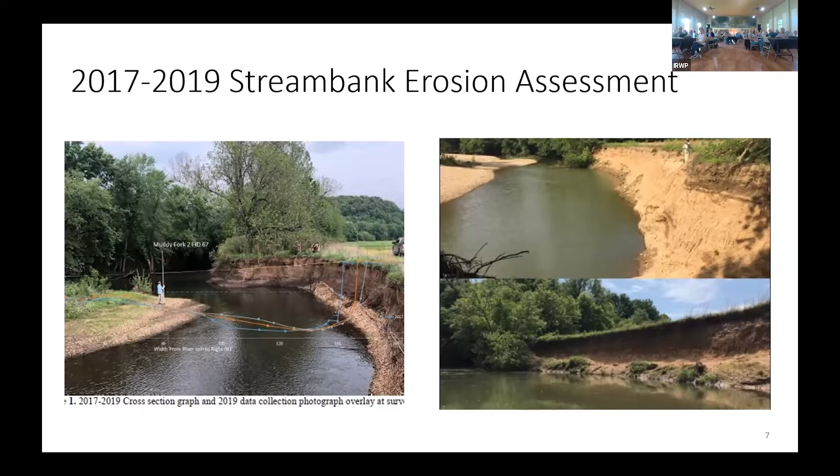So these are just some of the results. 2% of the stream banks rated as extreme, losing at least 3 feet a year. The takeaway here is that 38% of the stream banks were losing at least 1 foot per year, and this is across the entire watershed.

What this indicates to us is system-wide change. Something is happening to this watershed to facilitate, to cause this extreme erosion that we're seeing.

We had an average erosion rate of 5.2 feet per year. We had one landowner that was losing an average of 42 feet per year.

Sediment loading of the study — this is just the study area, which was about 5% of the stream banks in the watershed. Just that study area was loading 37,000 tons of sediment per year. Phosphorus loading was 56,000 pounds per year.

We worked with our 5 largest wastewater treatment facilities to put that number in perspective, to have a number to compare to. They are putting in 24,000 pounds per year. So stream bank erosion alone is loading over twice the amount of our wastewater treatment facilities.

The takeaway for me, which could be debated probably, is: if we turned off all the phosphorus in the wastewater treatment facilities — if that was even technically or financially feasible — we would still have a phosphorus problem just from stream bank erosion.

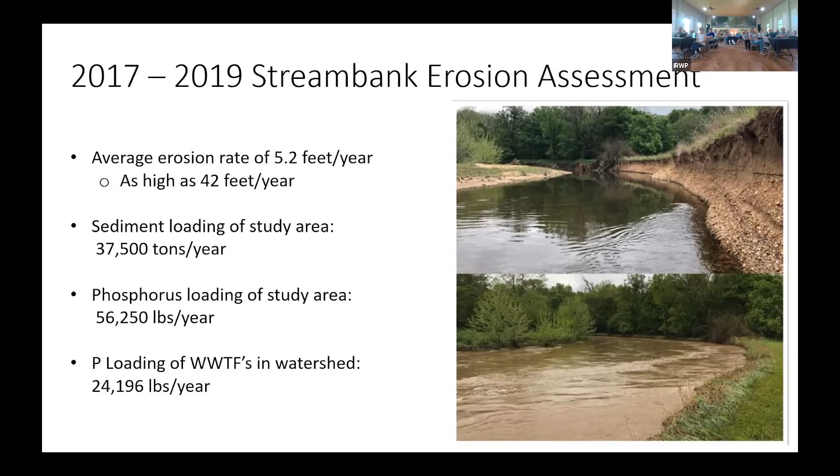Why do we care? Who cares about stream bank erosion? It's a loss of productive lands. If we assume that land right now in Arkansas in the watershed is going for, what, 5,000 to 6,000 an acre, that's money directly we're sending to Lake Tenkiller.

It's a safety hazard for people and livestock. It threatens infrastructure. Many of you are dealing with this every day, trying to deal with flooding and then the infrastructure losses that we have.

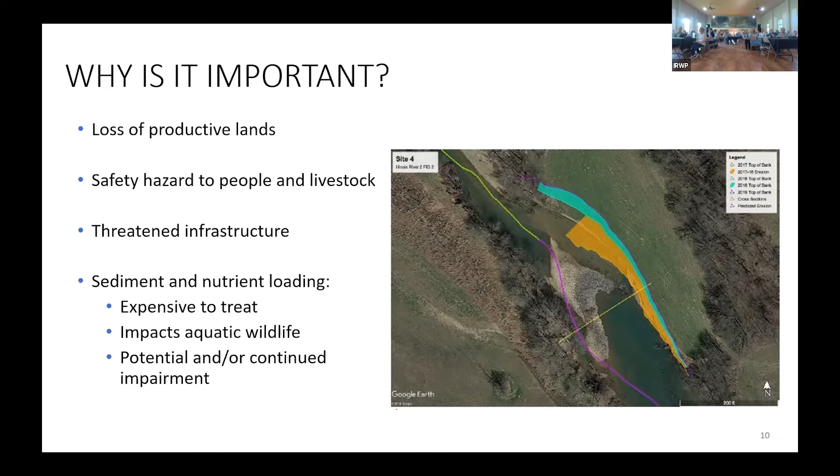And then, as I said, sediment and nutrient loading is expensive to treat. The Illinois River is a drinking water source; we estimate it serves about 65,000 customers. It's really hard to treat for, it impacts aquatic wildlife, and will have potential and continued impairment, especially in Oklahoma.

So what's the role of urban stormwater here?

Okay, so we're going to do some back of the napkin math here. In a natural ground cover scenario, if 1 inch of rain falls on 1 acre of land, about 40% will evaporate, 50% will infiltrate down into the soil, and 10% will run across the land. If we go to a medium density, which is approximately what Northwest Arkansas is, evaporation doesn't really change in a 1 inch rain, but infiltration goes down significantly and runoff increases.

So 1 inch of rain over 1 acre is 27,000 gallons. In a natural ground cover scenario, 10,000 gallons would evaporate, 2,700 gallons would run over the land, and 13,000 gallons would infiltrate down. In a medium density scenario, evaporation doesn't change much, 9,000 evaporates, 8,000 runs over the land, and 9,500 infiltrates down into the soil. So the key takeaway is that for each 1 inch rain, we have 5,400 more gallons of water flowing over the land, going into detention and retention in some cases, but ultimately getting to our local creek, river, or stream.

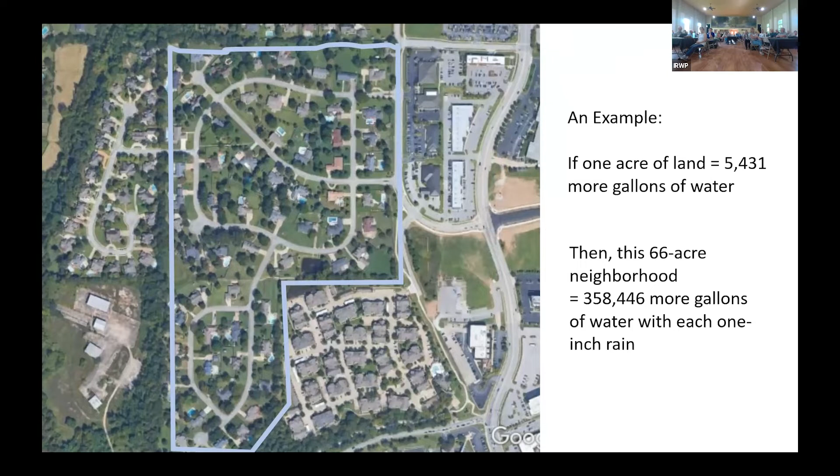So here's the neighborhood I grew up in. Here's the little tributaries, the headwaters, and here's where that water all flows to. This upstream watershed area is 2,600 acres, which results in 14 million more gallons of water. This is a very small snippet of Northwest Arkansas. So the approximate area—and again, this is all estimation, my own back of the napkin calculations—in Northwest Arkansas, we are producing 263 million gallons of water with each 1 inch rain.

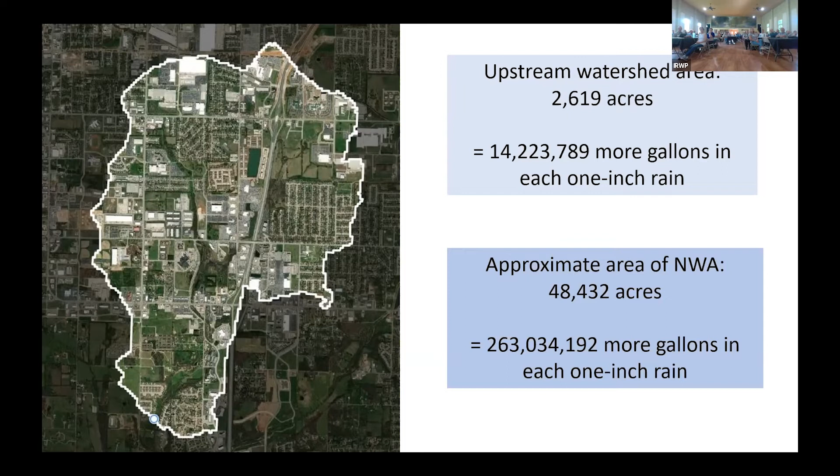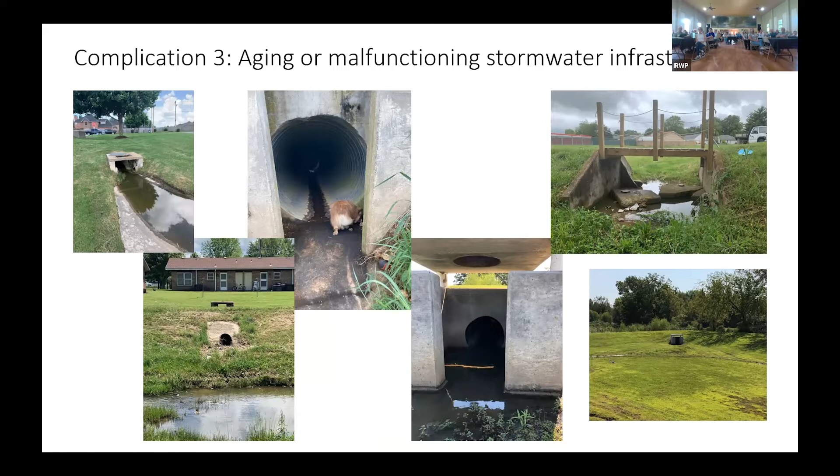Complication 3: we do have stormwater infrastructure that's intended to deal with this situation, but we do have some areas where there is aging and malfunctioning stormwater infrastructure. And this is across Northwest Arkansas, it's not just one city.

Okay, I'm going to try technology again.

So how does urban stormwater relate to stream bank erosion? And I just want to show you this little demonstration video. So you can see here, there's this—oh, dang it. I'm not much on technology, I'll admit that. There we are. So COVID's been kind of tough for me.

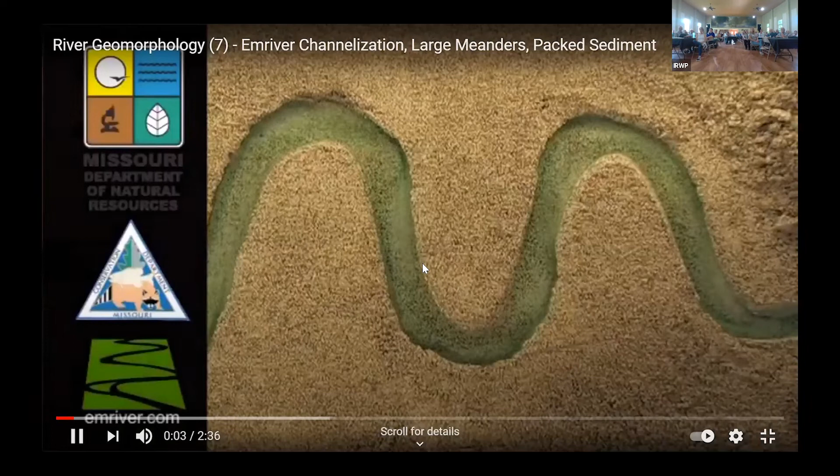Okay, so in a typical stream, you see here, not much is changing. There's a constant rate of sediment flowing through the system. This is kind of how a natural system works. But if you channelize or change the flow of the water—meaning you just make it straight—you can see here that the water starts flowing at a much faster rate and just starts eating away at this section of river. You'll get areas that flow faster than others that flow slower, so you get some deposition in the slow moving areas, and then more erosion as the water speeds up here.

Okay, so now we've put more water into the system at second 53. You can just see while this upstream headwater section where many of our cities are hasn't changed very much, you see what's happening over here. And if we get the field tour, Crawfords, this is exactly what's happening on your property right here. The stream is widening, it's getting more shallow, you have extreme erosion on both sides. So the whole ecological function of this river, as we'd put it in IRWP terms, is completely decimated whenever you get this extreme volume of water.

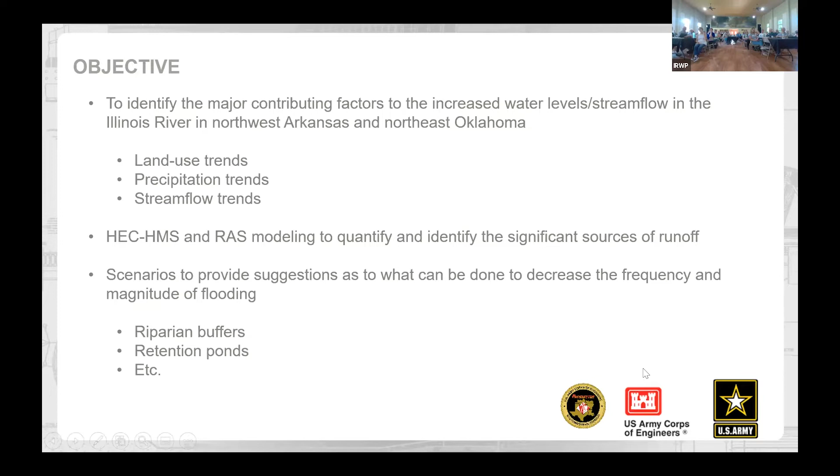The objective of our study is to identify the major contributing factors to the increased stream flows in the Illinois River in Northwest Arkansas and Northeast Oklahoma. We're looking at land use trends, precipitation trends, stream flow trends, and also doing some modeling. We built an HMS watershed model and a RAS river model to quantify and identify the significant sources of runoff, in order to produce scenarios to see what we can do to decrease the frequency and magnitude of flooding. The scenarios haven't been developed yet, those are still in discussion, but something like adding riparian buffers or retention ponds, as Nicole just mentioned. So the outline: I'm going to go over land use trends, precipitation trends for the entire basin, stream flow trends and characteristics, and then show some of the modeling results.

Maybe. It's not advancing. Can you advance it for me, please? Thanks. There we go.

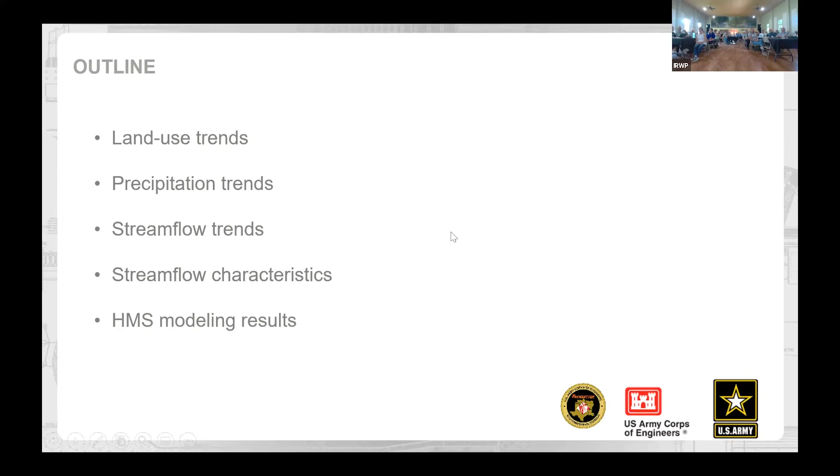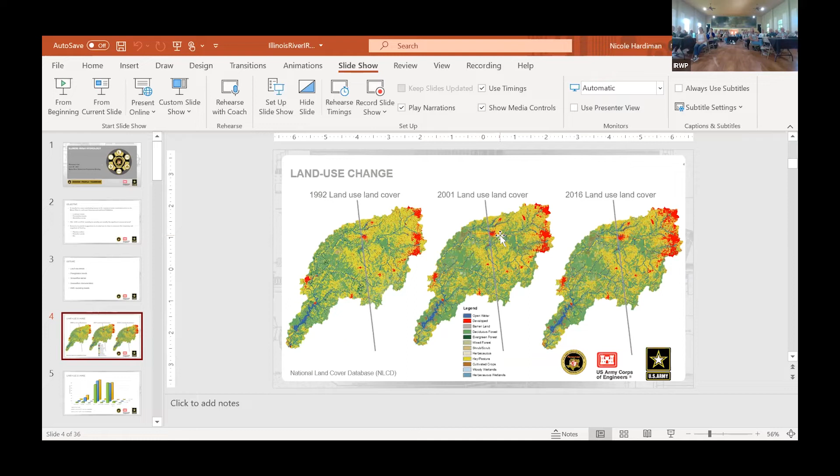Here are the land use change maps starting in 1992, going through 2001, and then through 2016. The red areas are the developed land, and we all know that the part of the basin that's been developed the most is in the northeast portion of the watershed. There's a pretty significant change from 2001 to 2016. Some of the smaller areas, like Tahlequah in Oklahoma, have had some change, but not near as much as the northeast part of the basin.

Oh, did I do that? Maybe I should just let you do it.

Here is a graphical representation from the maps I just showed: area in square miles on one axis, and the developed or different land use classifications on the other. You can see from 1992 to 2001 to 2016 the increase. In 1992, there was about 62.2 square miles of developed land, and keep in mind this is the entire watershed, the big picture. By 2001, there was 142.6 square miles, about a 130% increase in developed land. From 2001 to 2016, there was another 20% increase. If we had 2020 land use data, there would probably be another significant increase in developed land. Some other things to note: forest land increased and hay and pasture land actually decreased, so some of that hay and pasture land was likely converted to forest, which is actually good for the watershed. If we could go back to this map for just a second.

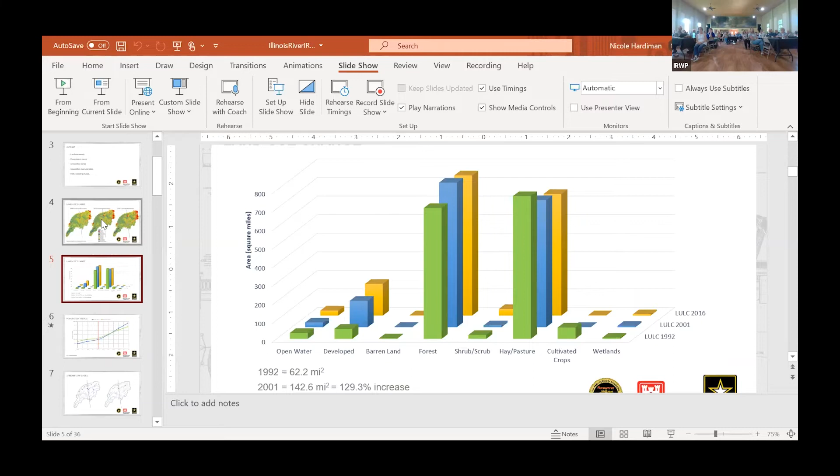It looks like the majority of it is concentrated in this part on the Arkansas side, just by visual look-sees. So I just wanted to make that clear.

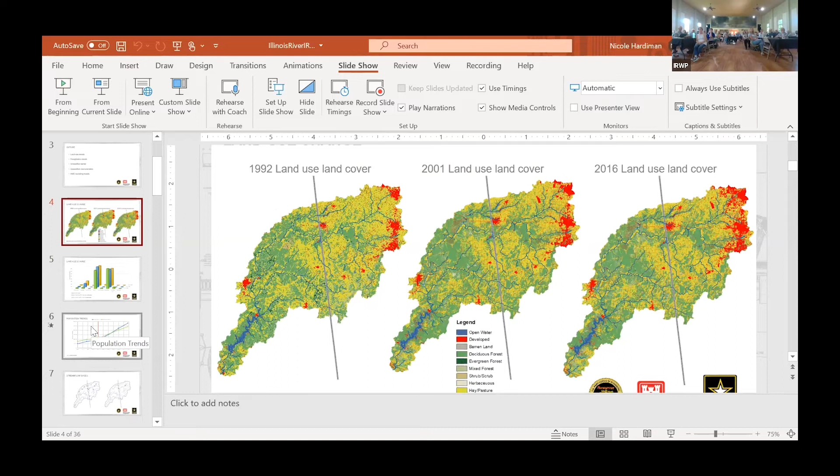Next I wanted to look at population trends to figure out when the developmental boom actually happened. So I plotted the population data for Benton and Washington County going back to 1970, and you can see there's a pretty sharp inflection point around 1990 where the population really started increasing substantially, especially for Benton County.

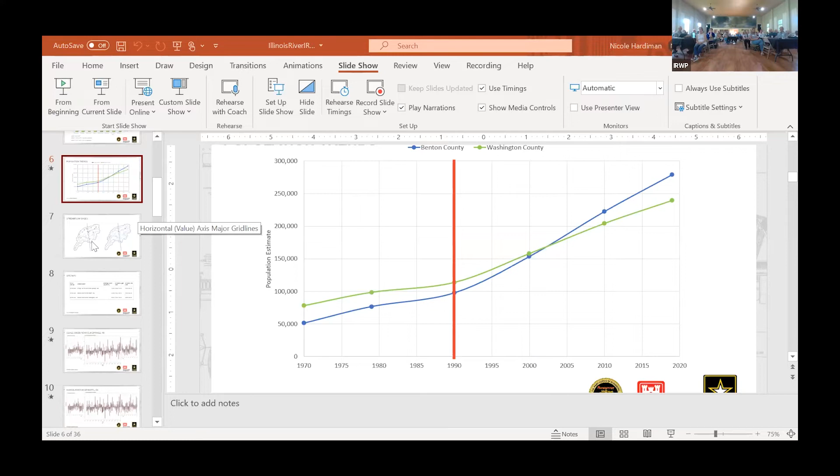This is going to be tricky without having my animations, but I think if you started it from here, we can proceed.

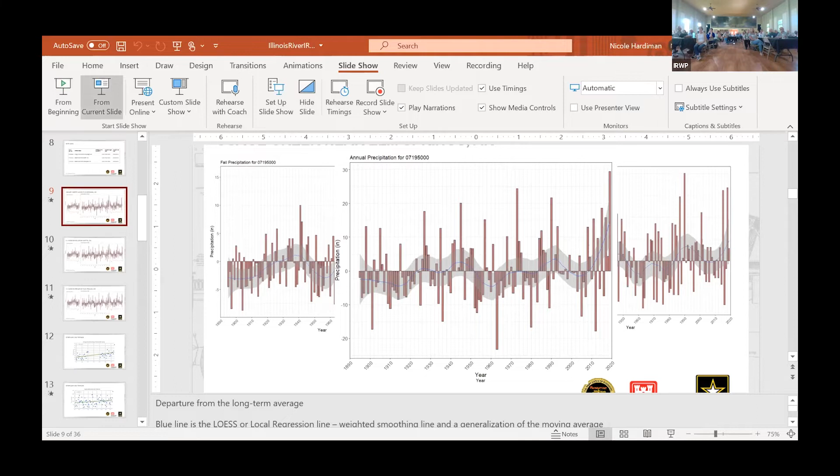So what we did is take the climate data from the PRISM Climate Group, out of Oregon State University. They have climate data going back to 1895, so it's a really long-standing set. We took that data and averaged the precipitation data above each site, in the subbasin above each gauge, and that's our average.

This zero line represents the long-term average precipitation for each site. The bar graphs are the departure from that precipitation - anything below zero is less than the long-term average, and above zero is additional precipitation above it. The blue line represents the moving average of those bars, and the gray lines are the error around that blue line. You can watch it go up and down, and then it takes a pretty sharp turn upwards for the later part of the last decade.

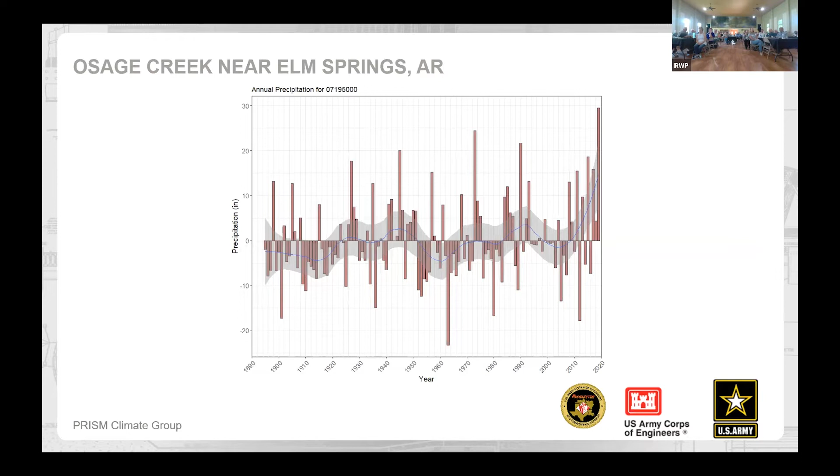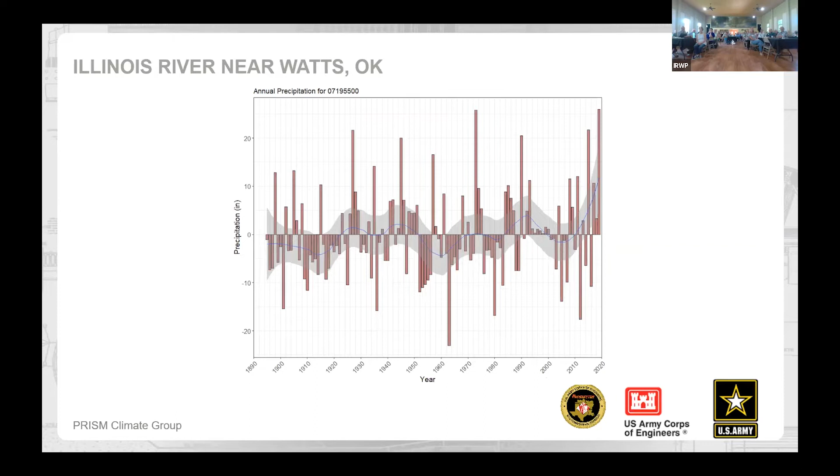We did this for all three sites: Osage at Elm, Watts with spring precip, winter, and the overall annual average, and again for Tahlequah. You're seeing the same pattern among all of them, with spring rains having the biggest contribution, and winter and fall also contributing to the annual total.

One thing I wanted to note is we also did this for the summer months, and for summer it just kind of hovered around that zero line. So there wasn't any additional contribution of precipitation during summer - it stayed fairly consistent throughout.

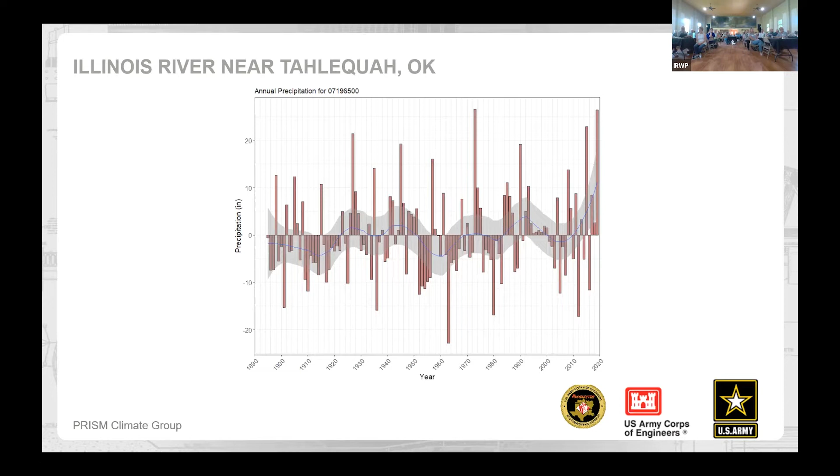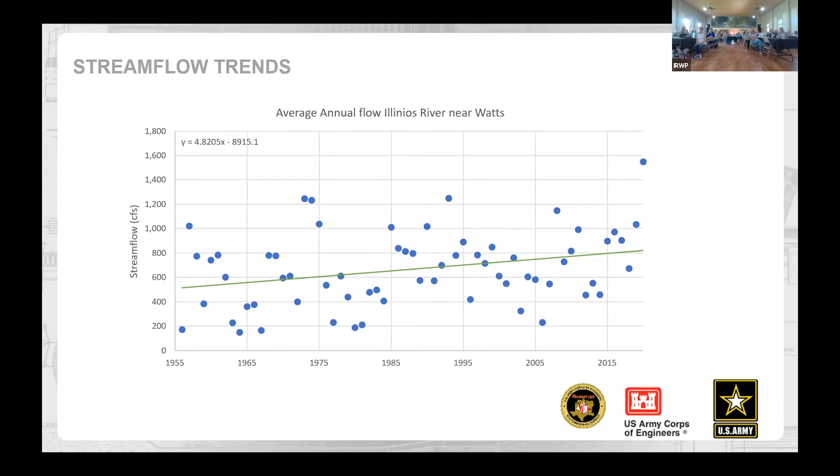Okay, so I'm going to talk about some stream flow characteristics. Hydrologists use these to help define what the flow in the stream is doing. We use magnitude, frequency, duration, timing, and rate of change of the stream. A lot of times we do comparisons of before a period and after a period. A lot of ecosystem restoration work uses this to figure out what the stream was like before versus what it is now, and try to go back to what it was before. So I thought I'd employ this for this.

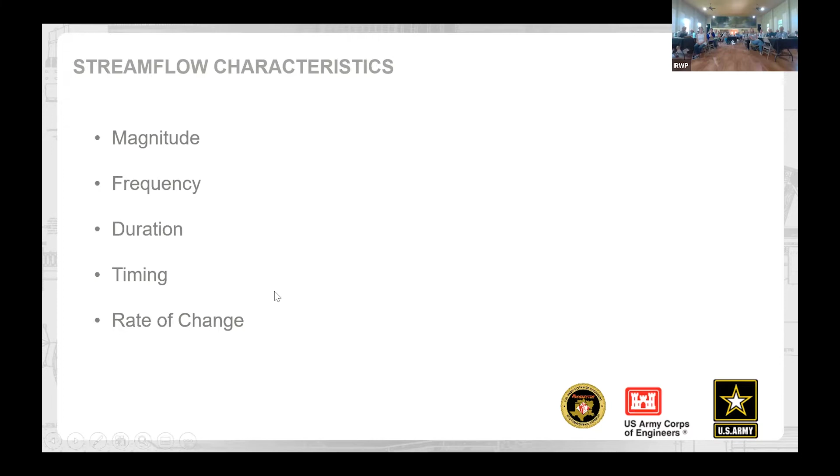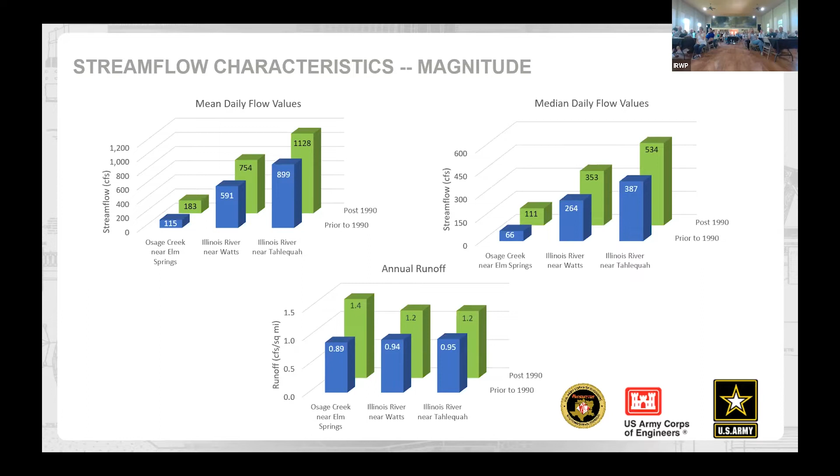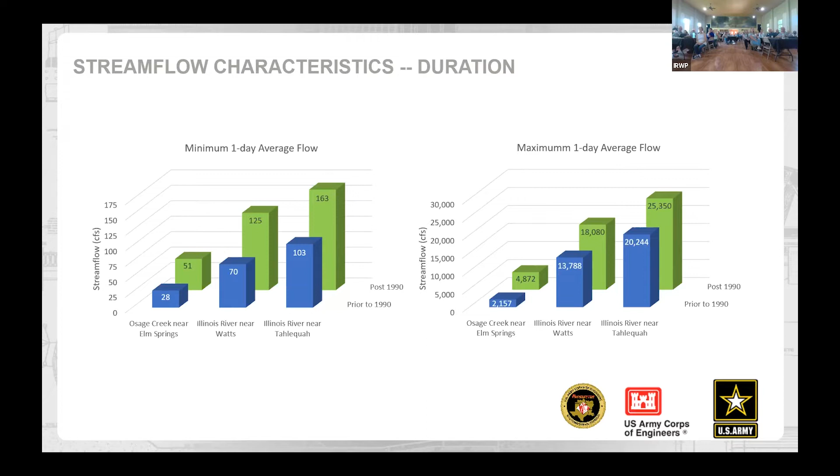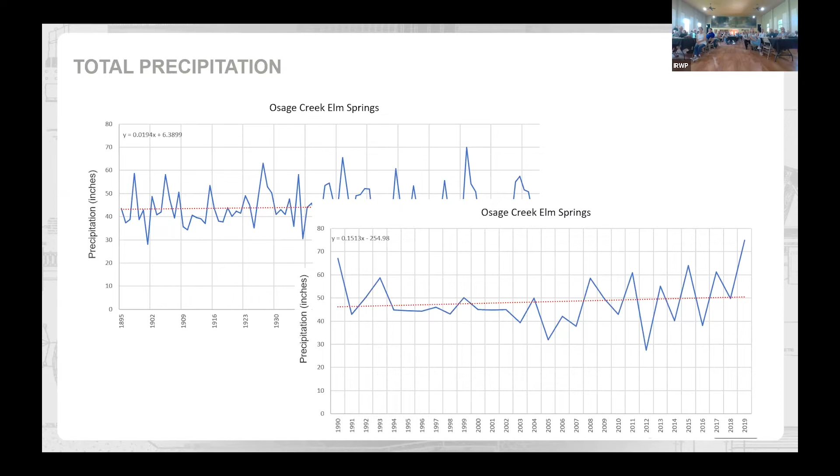And then this is post 1990. I don't know if you can see this, but the slope is 10 times greater than it was prior to 1990. So not only is precip increasing overall, it's increasing 10 times more in the last 30 years or so.

So this represents the 1% annual exceedance probability, which equals the 100-year flood. The black dots are the peak flows that I showed earlier. The red dots are the 100-year flood, and this represents the area around that. As we get more peak flows, we're able to hone in more on what the 100-year flood should be.

I just wanted to point out that here at Watts, the 100-year flood, oh, it's a touch. Oh, you have.

The 100-year flood has been exceeded 3 times in the last decade, where it hasn't been exceeded in the past. Tahlequah, same thing, 2 times in the last decade or so. And then there's that 1950 flood, so one other time in the past.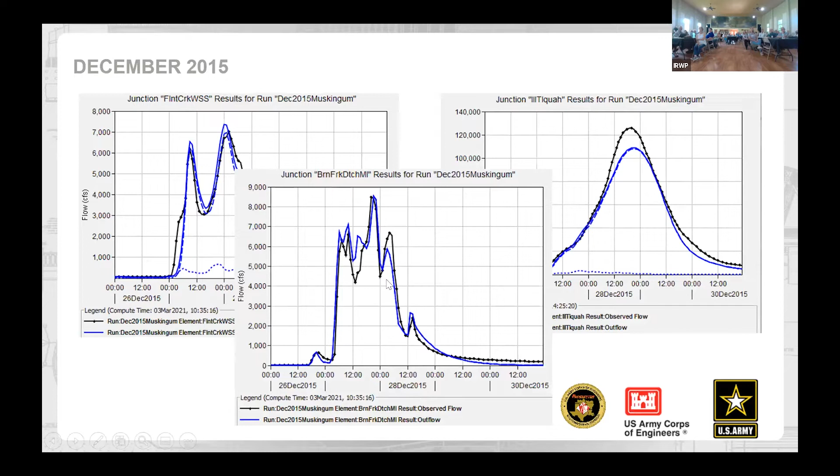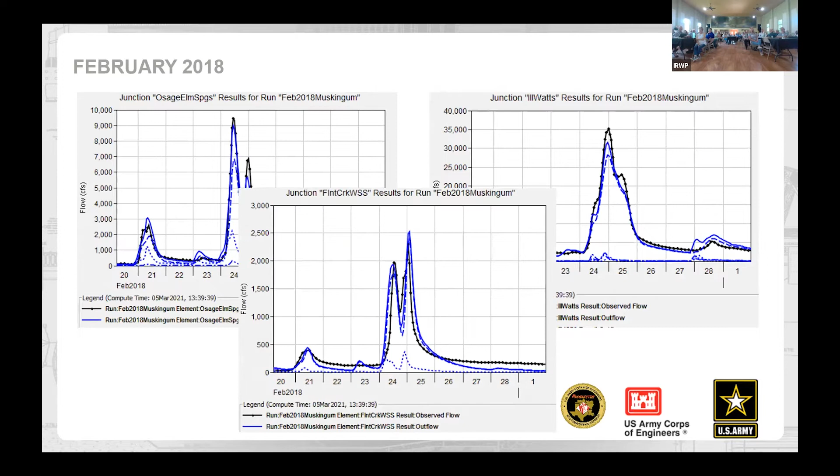December 2015 event. We got Flint Creek near West Siloam Springs, Illinois Tahlequah, Barren Fork, Dutch Mill. Next, February 2018 event. That's Osage Elm Springs, Illinois Watts, and then Flint Creek, West Siloam Springs. And I probably went through that pretty fast, but it's typically how I roll.

So in conclusion, we all know population has increased, which has led to the developmental increase in the watershed, but precipitation has also increased overall, and more so in the last few decades. The stream flow characteristics indicate that the number of low flow days are decreasing, and low flow volumes are increasing. However, also the number of floods are increasing and are reaching higher volumes. There's just a lot more water in the system.

The 100-year flood has occurred multiple times in the last decade, which we hadn't seen before, especially at Watts. Only one other time in Tahlequah. And then finally, looking at those plots of the simulated and observed stream flows, we feel like the modeling results are good enough to develop those robust scenarios. So those are our next steps. We're going to come up with those scenarios, see if we can't reduce some of the flooding in the Illinois River, and stay tuned for a future presentation.

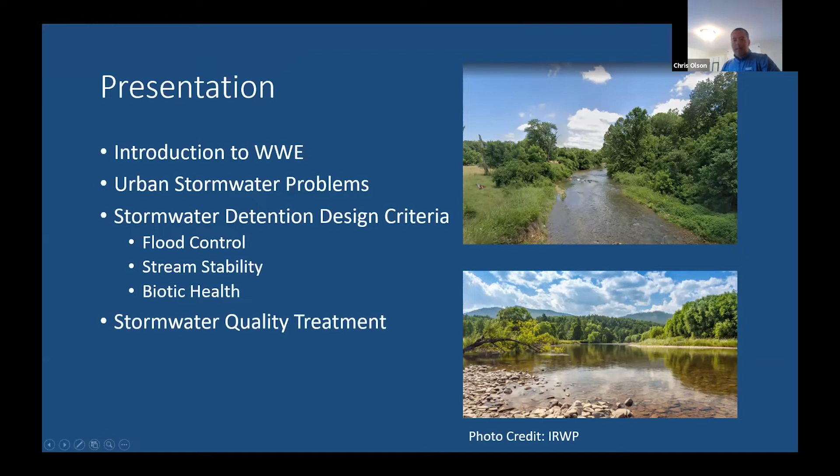So, a brief intro to Wright Water Engineers. I've been with Wright Water for about 2.5 years. Many colleagues have worked on previous projects in the Northwest Arkansas region, including John Jones, Jane Clary, Andrew Earls, and Ken Wright, who founded our company. Past work includes updating and developing stormwater criteria manuals, the Cave Springs recharge area protection plan, various stormwater master plans, stormwater permitting, phosphorus removal from wastewater and stormwater, and detention pond retrofit analysis.

Wright Water has been working on stormwater criteria manuals for over 50 years, starting with the original Denver Urban Drainage Stormwater Criteria Manual, developed in 1969 by Ken Wright and others. That manual has served as a benchmark for many other stormwater criteria manuals developed across the nation.

We continue to work on projects. We have about 3 or 4 criteria manuals that we're currently updating here in Colorado, and we provide peer review on criteria manuals developed outside of Colorado. I recently finished some projects in Lincoln, Nebraska, for example. Jane is working with Johnson County, who's talking after me, on some work in Kansas. We also provide a lot of expert testimony work.

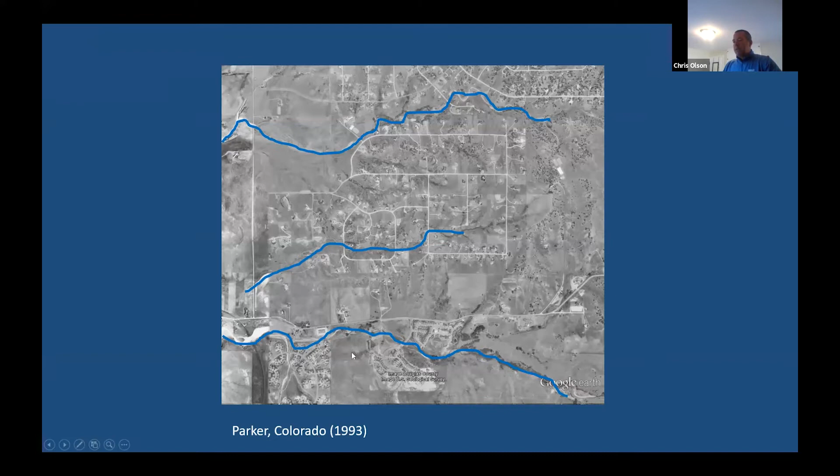Over time, as we develop, we begin to encroach on these channels. And as Nicole showed in that great video earlier, as we encroach on these channels, we change the size, the dimensions, and the direction, and that ultimately has significant consequences for flooding, stream stability, etc.

I'm highlighting here, going from 1937 to 2013, how much development has occurred along this drainage way, and you can barely even see a stream any longer in some of these areas.

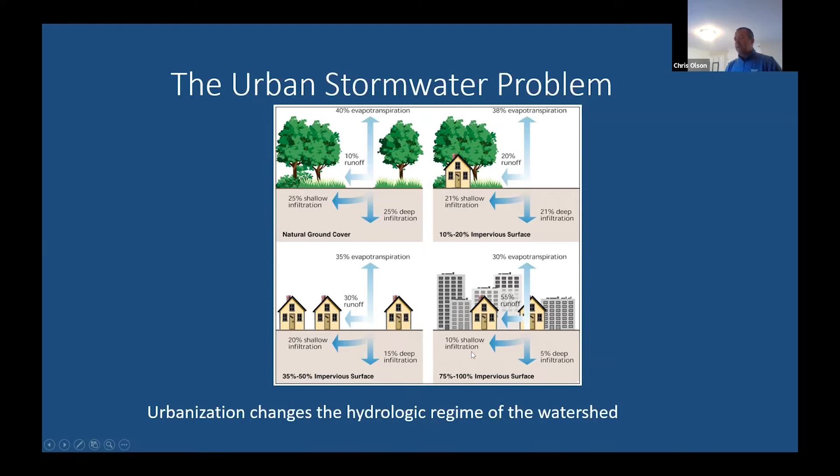This is one of our favorite graphics as stormwater managers, and Nicole already walked us through it, so I won't repeat. The story is that as we develop and increase impervious surfaces, we also increase runoff.

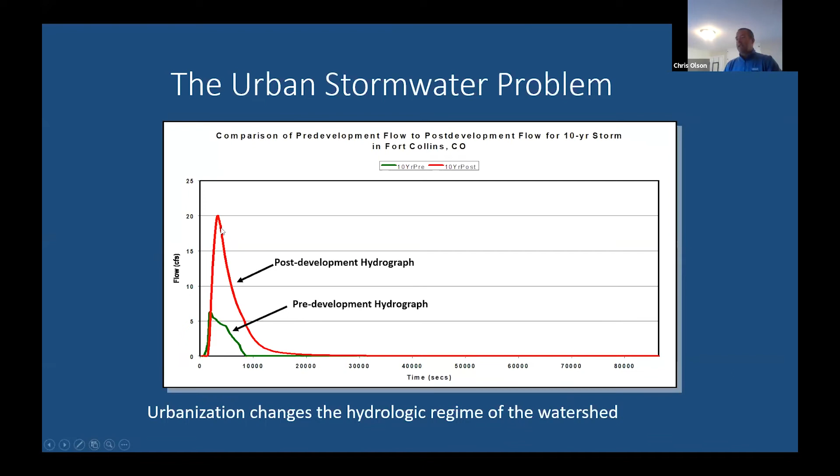This is another graphic showing how development changes the response of a watershed. For a simple 10-year storm event in Fort Collins, developing the watershed results in about 4 times as high of peak runoff as pre-development, going from 5 CFS up to 20 CFS, and that's only for a 10-year storm.

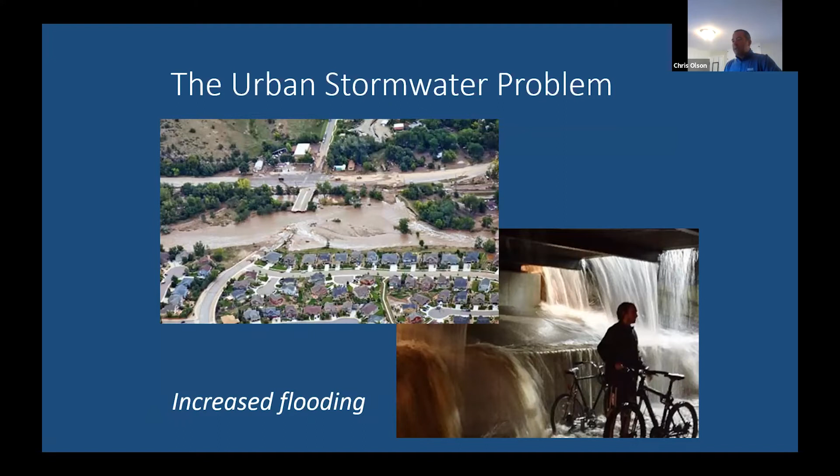Of course, that results in increased flooding, and it also results in channel instability and erosion.

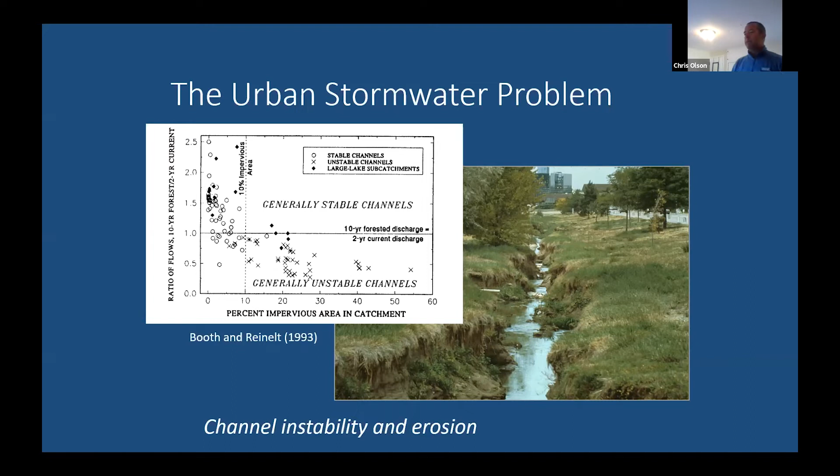Another way to look at this problem is with a flow frequency curve, for an undeveloped watershed and then for a developed watershed when it is uncontrolled—meaning without putting proper stormwater detention and other management facilities in.

What this demonstrates is that the 100-year runoff from undeveloped conditions now typically occurs once every 9 years as the watershed develops. What was previously a 10-year runoff event now happens about every 4 years. What was previously a 2-year runoff event now happens about 7 times per year. And a 1-year storm, which previously happened approximately once per year, can now happen more than 11 times per year.

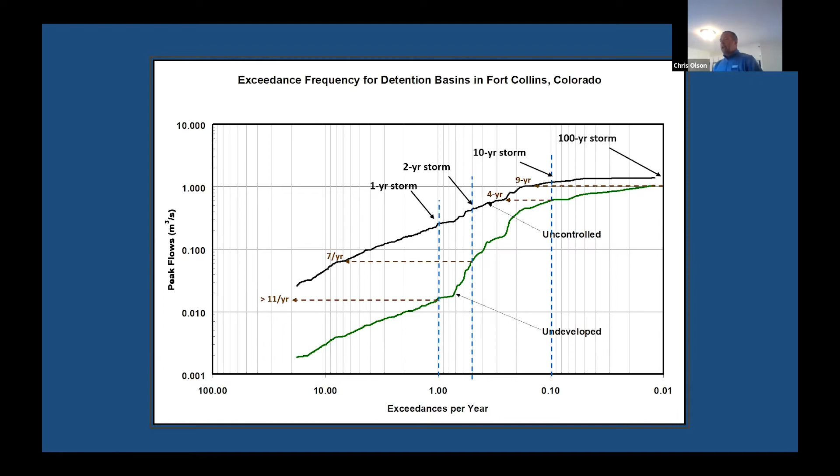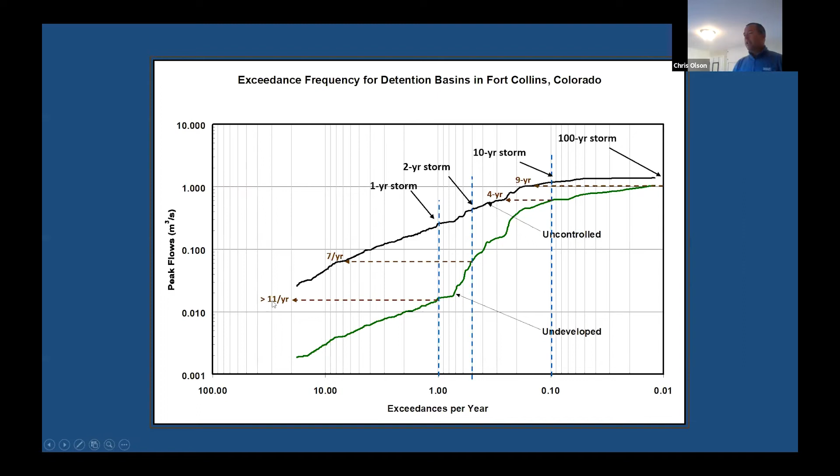What's really critical, especially for these 1- and 2-year storms, is that these are the flows that streams generally form around. So if we increase runoff to 7 to 10 times per year, that's obviously going to change the way that the channel responds.

What we typically do to address this increased runoff is provide detention. First I want to talk about the differences between on-site detention and regional detention. On-site detention usually occurs for smaller developments, less than 40 acres or so of contributing area. For larger developments, there might be multiple detention facilities. These are generally privately owned and generally not considered in stormwater master plans. I'll talk about why in a minute. They're also located upstream of the major and minor drainage ways, and they're designed to control flooding on a localized level.

Some of the issues with on-site detention: number one, a lack of maintenance. Because they're privately owned, they very often are not maintained, so they don't end up operating the way they were initially designed. This is a big issue—that's the reason why, here in Colorado, we do not incorporate on-site detention into regional master plans. We assume that over time these facilities are not going to be maintained and won't operate as well.

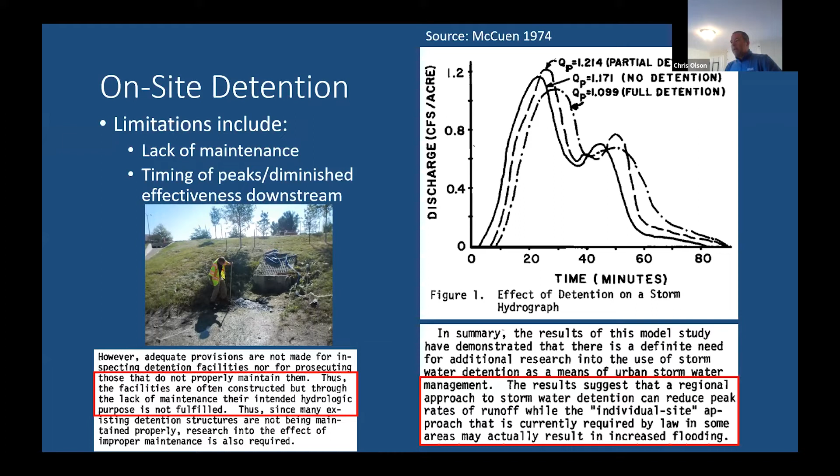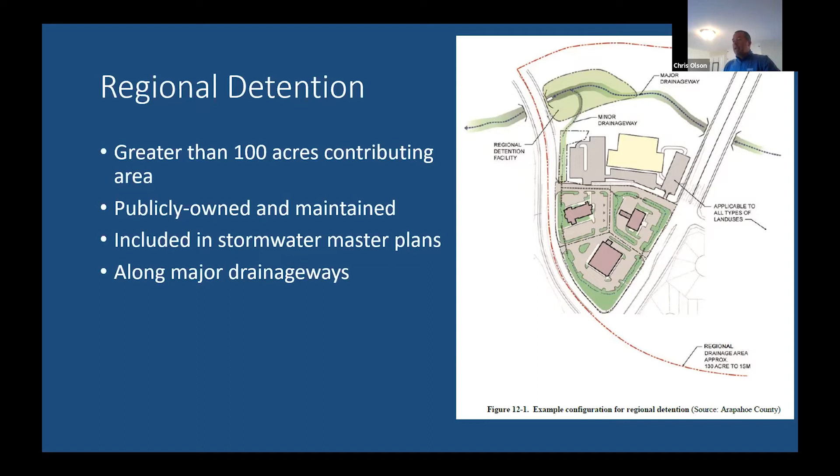I'll talk about a few ways we address that. Now let's compare on-site detention to regional detention. In Colorado and other places, regional detention typically has a much larger contributing area, at least 100 acres, sometimes several hundred acres. Importantly, these are publicly owned and maintained, so the issue of them not functioning as designed is really not a concern, because a public agency or entity is responsible for keeping them maintained. We do incorporate regional detention into master plans, and these are generally located along the major drainage ways.

Over the years, people have identified areas along the stream where certain flows cannot be exceeded. So even though the detention basins we were working on were located in the city of Aurora...

...for example, the city and county of Denver is immediately downstream, less than a mile from our project site. We needed to coordinate with the city and county of Denver on our design so that the flows we were discharging from these regional basins would not significantly impact folks downstream. That's really the importance and power of regional planning and sizing regional detention facilities.

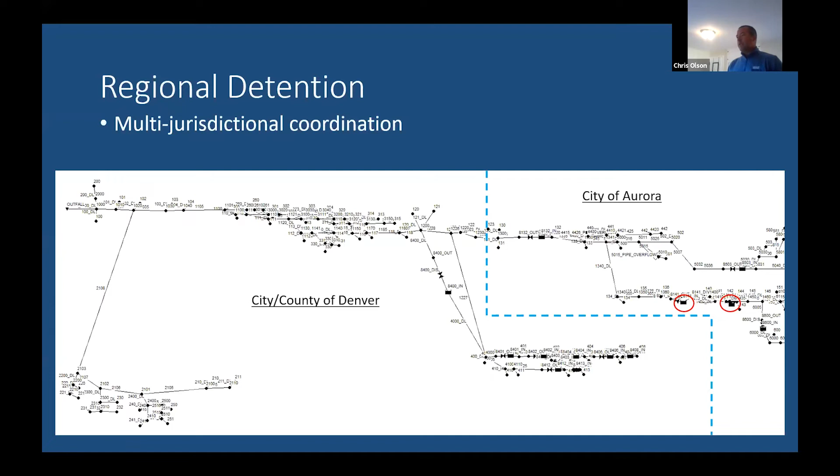In terms of how we size these facilities, every organization does it a little bit different. There are generally two important criteria that need to be followed.

Number one is designing to control certain return periods—that might be the 2-year event, the 10-year event, the 100-year event, or others in between. The other thing set forth in the criteria is what the maximum allowable release rates are.

This is a table summarizing a couple of different organizations, but generally the maximum allowable release rates are equal to the pre-development peak flows. So we need to control the water so that the rate at which it's discharged from a pond is no greater than what occurred from that site prior to development.

In some cases, and part of this addresses the issue I talked about, where you have multiple on-site detention facilities that may actually increase flooding or stack up the peaks, as we call it.

Some places, such as here in Fort Collins where I live, we actually have to over-control. What we mean is we have to control the 100-year post-development peak flow down to the pre-development 2-year flow. So it's not just matching the 100-year pre-development—it's actually over-controlling for that.

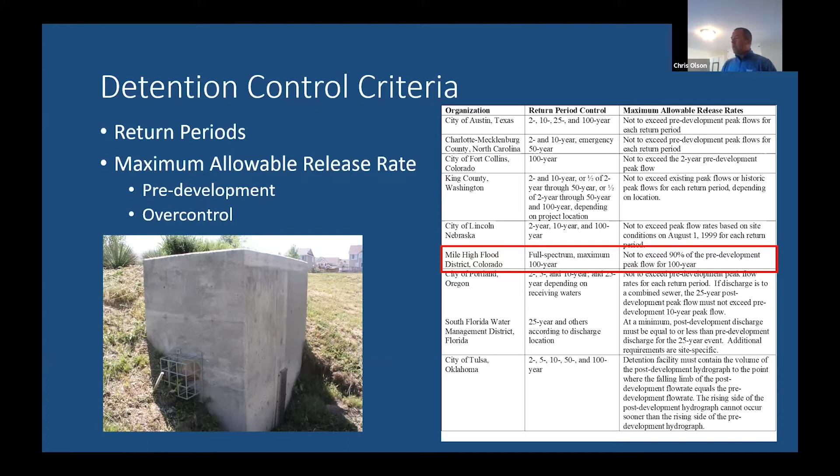The full spectrum detention is what I'll talk about here. Basically, it's not directly related to a single 2-year, 5-year, or 10-year event, but it's a methodology to control all of the events—starting from essentially a water quality event, with less than a 1-year return interval, all the way up to the 100-year.

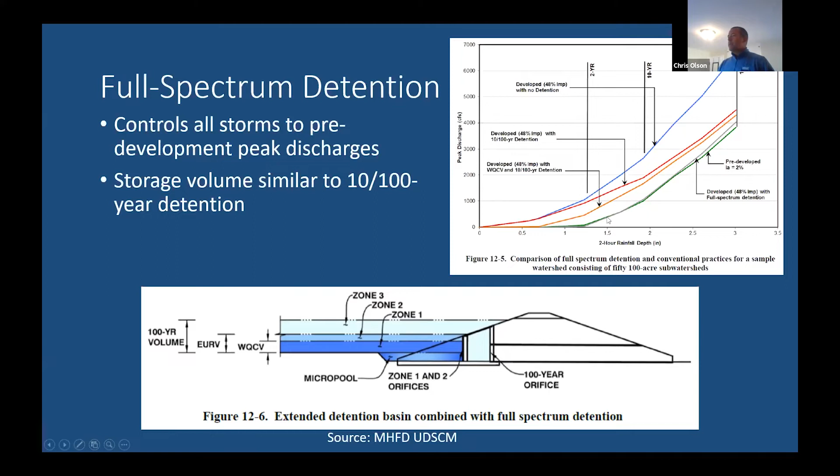What's important to know is that this full spectrum detention methodology doesn't require all that much more additional storage volume than just capturing and treating the 10-year and 100-year events. So you're not using more space, it doesn't cost more to develop, and it actually outperforms some of these other criteria that are out there.

So transferring into stream erosion, which we saw some great photos and examples of earlier, another way to look at these flow frequency curves is to plot the shear stress of a stream on them. Here we have 0.8 pounds per square foot and 0.26 pounds per square foot. These essentially relate to how much depth of water in a stream is needed to start eroding certain materials. The 0.8 PSF might be a larger sand material, and the 0.26 PSF might be more of a clay or silty material.

This was developed for a case study in Lenexa, Kansas. The point being that as you change the hydrology, the frequency that these shear stresses are increased corresponds to the development, and that's going to cause erosion and stream instability. But we can then look at the different controls we provide in a detention pond, tweak those, and determine how, for a specific region, those controls need to be designed to reduce erosion and shear stresses in the streams.

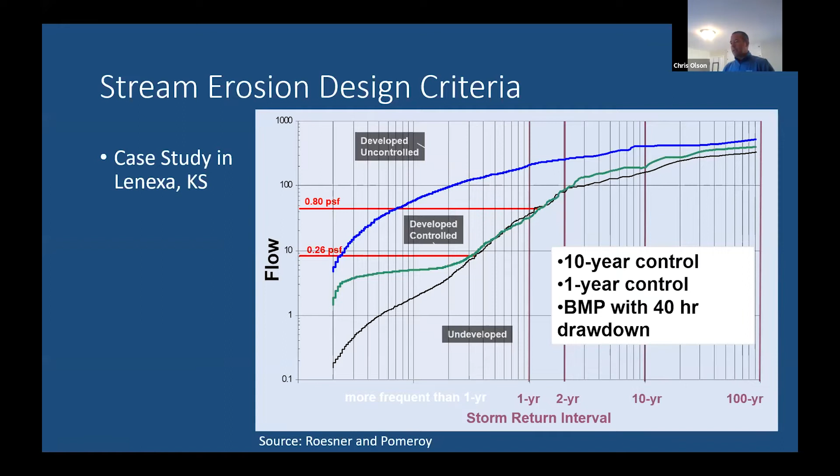This is again from the same case study. The point I want to show here is for these different shear stresses in an undeveloped condition, this is the number of hours over a 50-year simulation that these shear stresses were exceeded. So that basically tells you how many hours in 50 years that stream is going to erode. For a developed watershed that's uncontrolled, that goes up significantly, almost 2,000% or 1,000%. But if we put in certain stormwater controls, we can bring that down, not necessarily back to undeveloped conditions, but we can certainly reduce how much that channel is working.

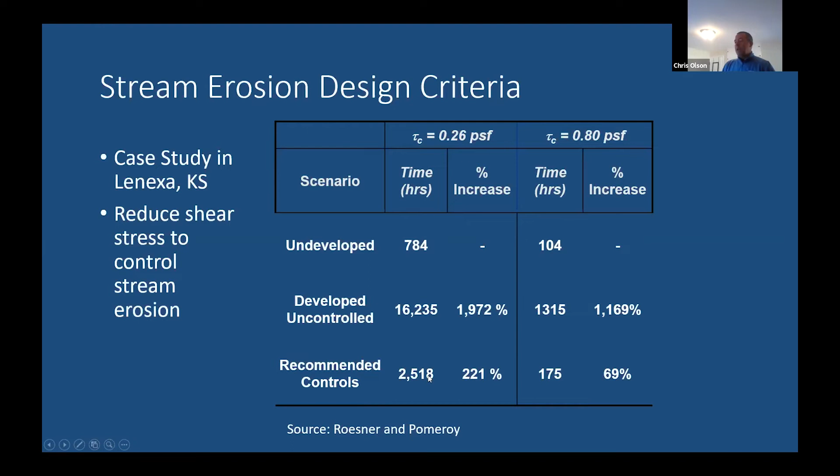Another point I'd like to make is that we can also look at these controls and begin to link them to the health of a stream, meaning the bugs that are in the stream. This comes out of some work from the Pacific Northwest originally, although we've applied it elsewhere. We have this metric that we can measure and model in a stream called the T0.5, and we found that correlates well to the number of bugs in the stream, or stream health. As you get an increase in the T0.5, you generally see more bugs, a better stream health. So we can calculate this metric for certain stormwater design criteria and extrapolate how that's going to affect the bugs and stream health.

Finally, we used all of these concepts as part of a stream and watershed prioritization study here in Fort Collins. Fort Collins has about a dozen or 15 streams running through the city, and we wanted to figure out how to prioritize improving and putting in stream rehabilitation projects. What we said first is, if you don't have the right controls in the watershed, if you don't have enough detention before you go replace a stream, that stream is going to continue to get blown out and need maintenance. So we used those concepts, including the T0.5 and some bug studies, to say: these watersheds need more stormwater controls before you fix the stream, and these watersheds already have enough stormwater controls so you can go ahead and fix the stream and you'll be fine.

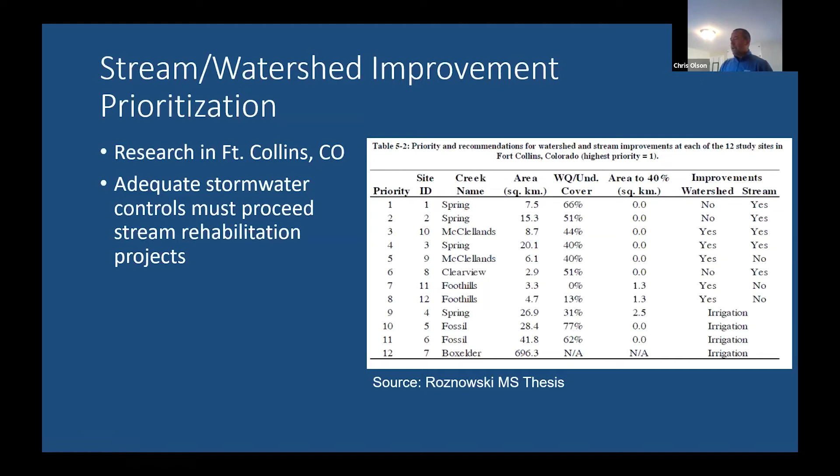So in my last few minutes here, I want to touch briefly on stormwater quality. Obviously channel erosion and flooding are significant issues, they cost a lot of money and cause a lot of damage, but pollutants are just as important. Urban stormwater is an issue for stream quality also.

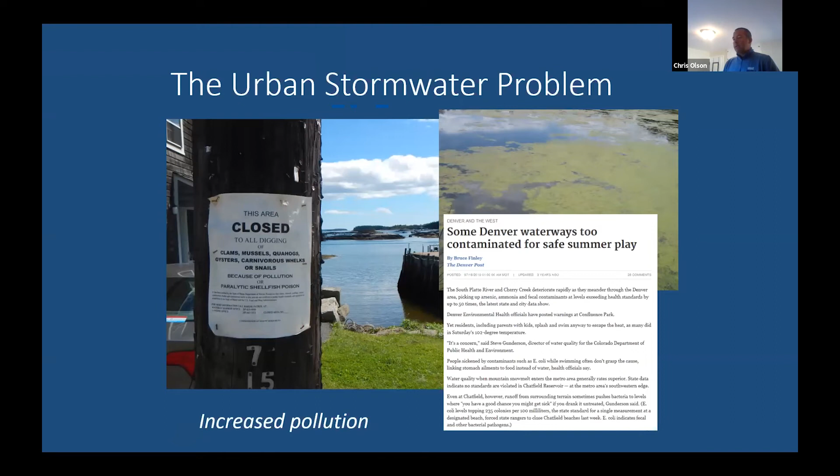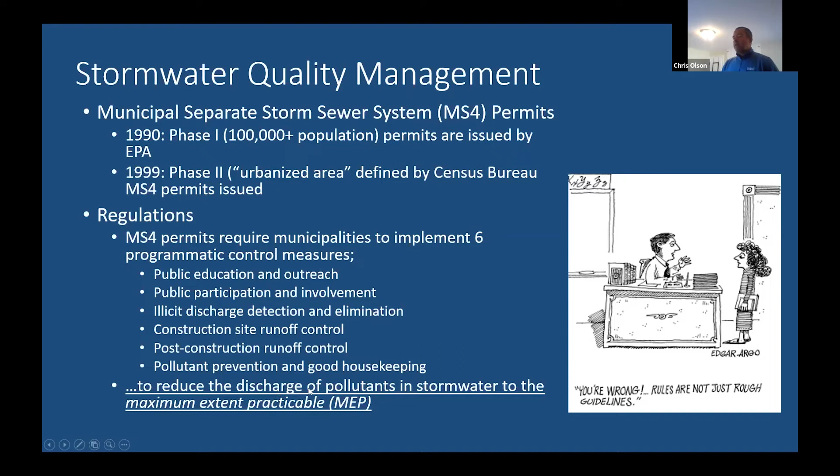Real quick, most cities over the threshold of about 100,000 people fall under an MS4 permit, which is a Municipal Separate Storm Sewer Permit. This permit is issued by the EPA or by the local environmental agency, and it has multiple regulations and requirements, including six programmatic controls: public education, illicit discharge detection, construction site runoff, and post-construction site runoff controls for water quality. The key language in these permits is that you have to implement these control measures to reduce the discharge of pollutants to the maximum extent practicable.

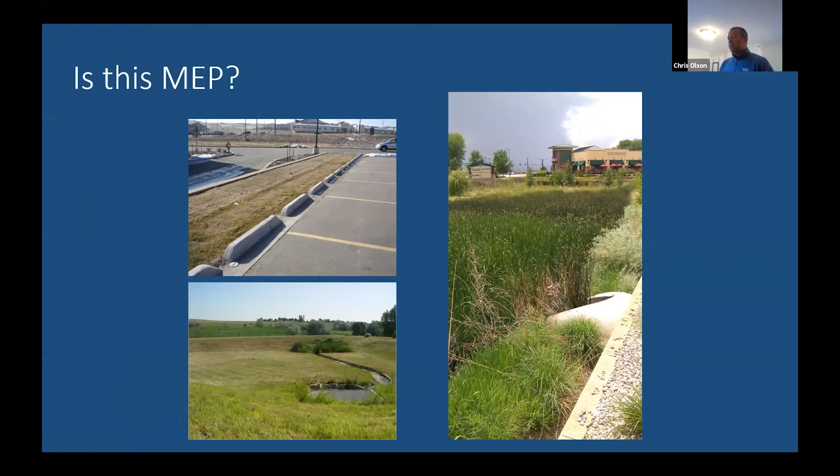So the question becomes, what is MEP? What is maximum extent practicable? How does that affect the size of these control measures? How does it affect how they perform? We can't necessarily say that we're removing X amount of pollutants and therefore it meets MEP requirements. It's a very vague standard.

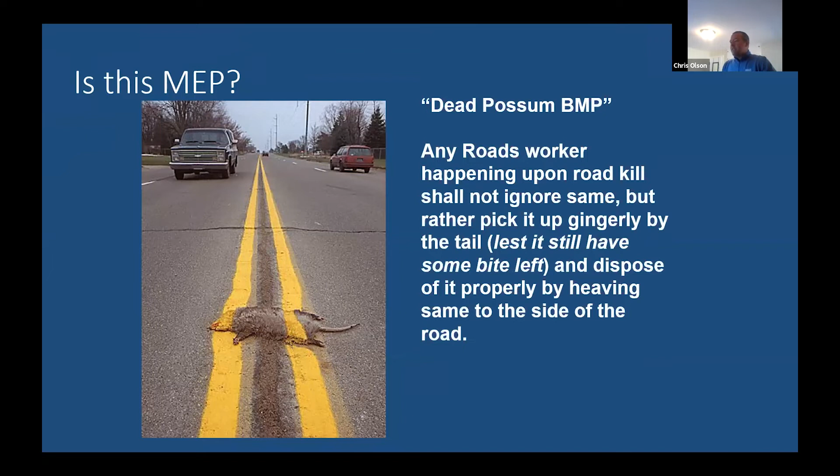And so this is always a funny little slide: is this MEP? Is it okay just to leave the roadkill there, or is it better to heave it to the side of the road? Which of those is MEP? I don't know.

But going back to this concept, part of what we have done is looked at, okay, maximum extent practicable doesn't mean we have to remove everything. It means that we need to remove as much as we can that is cost effective and not overly burdensome to whoever has to pay for these facilities.

So we can use this concept to say, all right, maybe if we size these facilities to capture 1 inch of rainfall, we're getting most of it. We know we're not getting all of it.

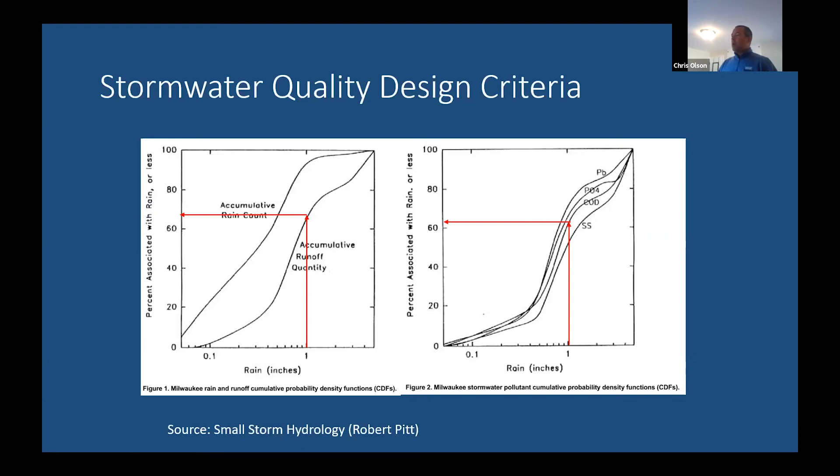So we took that concept in Colorado and applied it. What we find is that if we were to increase the size of a stormwater quality facility by 2, we really only get a minimal additional pollutant removal, going from 88% to 90% by doubling the size. To put this in perspective, in Denver what we have to design these facilities for currently is about a little over half an inch of rainfall.

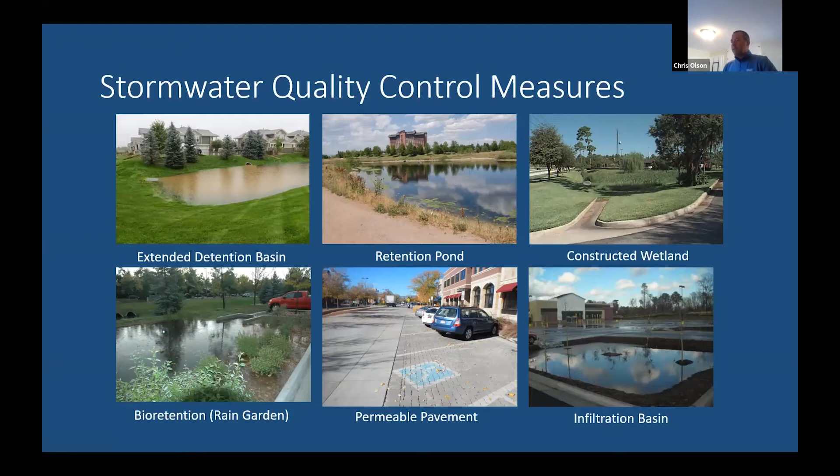This is definitely an area we continue to research and understand the performance of a lot better. What's really nice is that the latest MS4 permit for Colorado is actually providing an incentive to use some of these more innovative approaches to infiltrate the water. So now, if we can demonstrate that we will capture runoff and fully infiltrate it, we actually only have to size our facilities to be 60% of the current water quality capture volume.

So about 0.4 inches of rainfall instead of 0.6. So we have smaller facilities, they cost less, they take up less room, but they perform just as well, if not better, than some of these other larger facilities.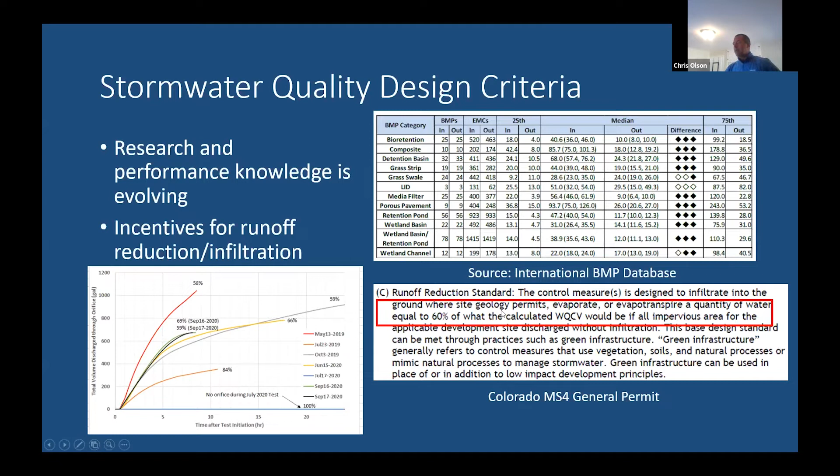You can see here a bunch of different configurations that we're kind of playing with, but we really are starting to get into that 60% range. So we'll use that to demonstrate to CDPHE that these facilities actually do work, and we don't have to design them to be quite as big.

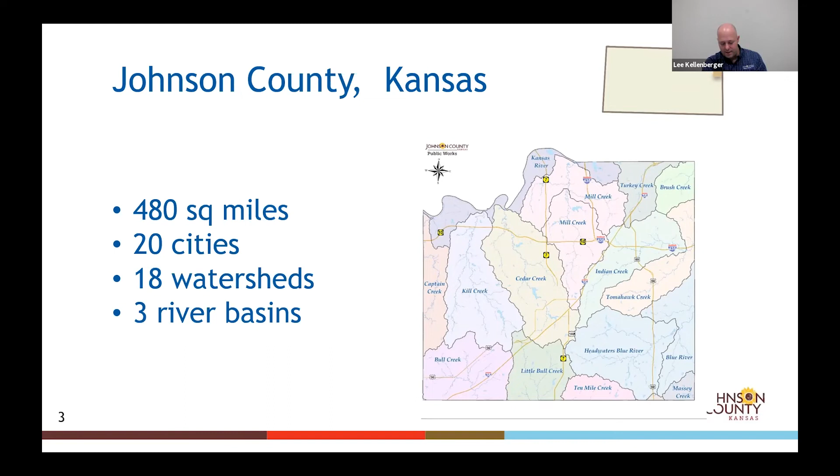A little bit more about Johnson County. We are a fairly affluent county, we have a lot of businesses. Our labor force is really employed in high-tech jobs, healthcare, science, education, retail. Our population is about 620,000, just over 600,000. We have retail sales estimated over 15 billion, and that will come into play as an important part of our program because we have a retail sales tax to fund stormwater.

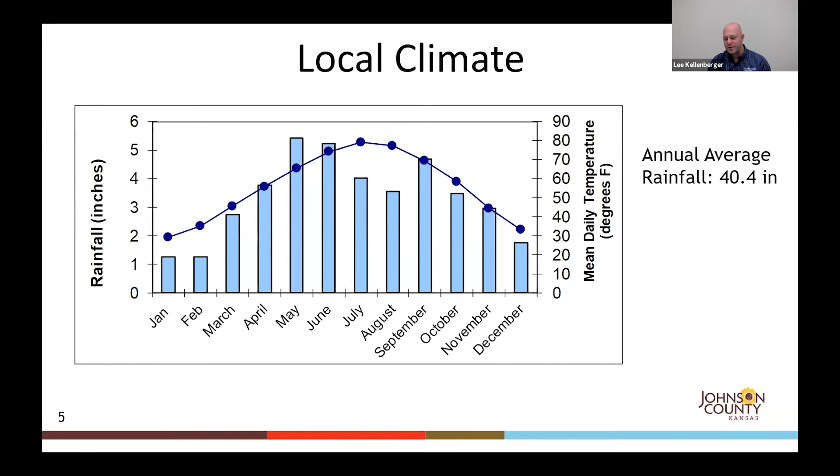One last slide on the background of where we come from in our area of the country. As a water resources engineer, we always take the opportunity to talk about climate and precipitation. Here in Johnson County, we have an average annual rainfall of about 40 inches. I looked up Benton County in your part of the world, and you guys have just over 53, so you already get 13 more inches of rain than we do. You have us beat there.

So, on to the stormwater management program. You're going to see this timeline slide throughout my presentation, and it highlights several key points in the evolution of our program. Starting back in 1988, when the state of Kansas passed some enabling legislation that allowed counties in Kansas to adopt a one-tenth cent sales tax for the purposes of stormwater management and flood control.

So why would the state have done that? Well, actually, it was due to Johnson County. There was persistent flooding in northeast Johnson County, and some of the mayors of those cities actually worked with their state representatives to draft the bill, and they took it to the legislature in 1988, and it got passed. It was directly tied to Johnson County, and we were the only county to adopt that tax at the time. Unfortunately, there were only three years to adopt the tax, and that legislation sunset after about three years. So the rest is kind of history.

So subsequently, our Board of County Commissioners created the Stormwater Management Program, which is the county staff that we work with. We have 4.5 FTEs. And they also created what we call the Stormwater Management Advisory Committee. It's an advisory board to the Board of County Commissioners, and it's comprised of one voting representative from each city.

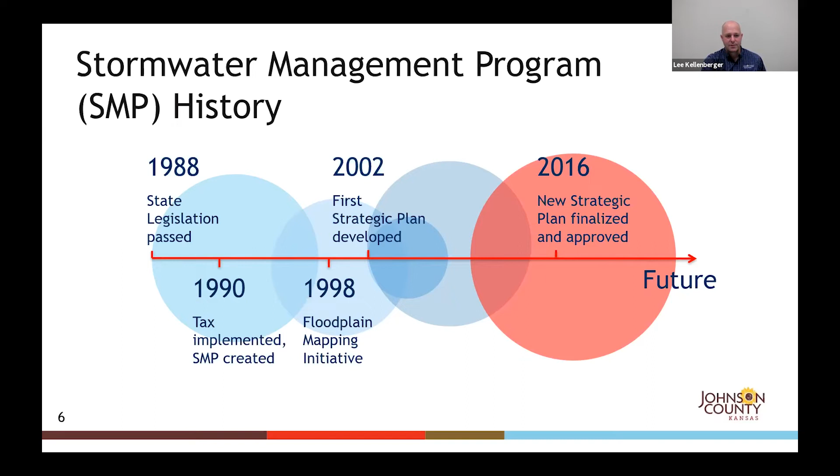But before I get any farther into the implementation of the program, I just wanted to touch one more time on the funding. I can't stress enough how funding is everything. We would not be the program we are or where we're at today if we did not have this funding source. So it's a 1/10 of a cent sales tax, where every dollar spent in Johnson County, 1/10 of a cent goes into our fund, our coffers.

We're in the 30th year of our program now, and we estimate the tax has generated over $300 million. We have a cost share component to our program, so we also leverage another $100 to $200 million on top of that. So with this tax, we've been able to invest close to $500 million into stormwater management in Johnson County. So it's dedicated funding. You'll hear that mentioned several times. The Board of County Commissioners can't take it and use it for the general fund or other initiatives in the county. It's earmarked specifically for stormwater management.

And finally, it's a growing source of revenue, unlike other sources of funding where you have a static amount every year, and with inflation, you lose your buying power over time. This seems to be kind of keeping up with inflation. So we could always use more, of course, but we're happy to have what we have.

So, all right. Moving on back to the early 90s, we have a new program set up with a dedicated funding source. And it was weird. The county was just basically administering a program and writing checks. Cities would submit their projects if they met our program criteria. They administered the project, and we reimbursed them after the fact. So it remained relatively unchanged for the first 10 years. We got a lot of good flooding problems solved in our county.

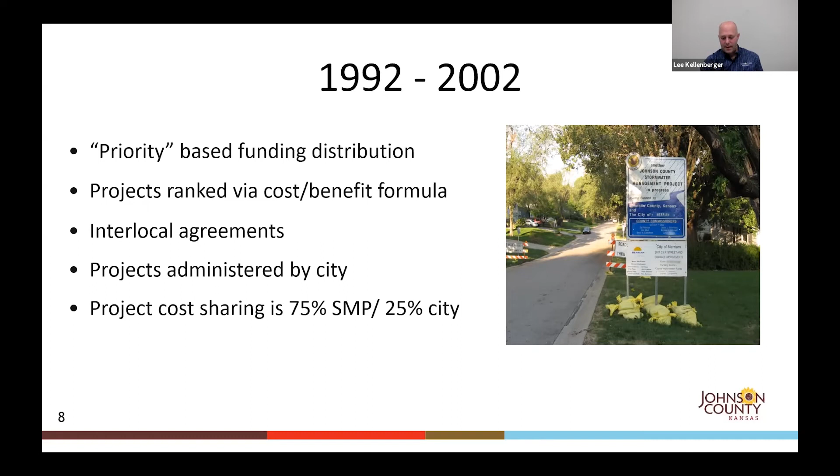And we really didn't know, by the late 90s, how much longer we would have to do this. There was some discussion that maybe we'd solved all the problems, or we're getting close to solving all the problems, and talk of even sunsetting the tax. Well, keep in mind, we were working on the premise of floodplain maps that were not digital, that were from the 1970s. So similar to what it sounds like in Northwest Arkansas, a whole lot of development had occurred in the last 20 years, and those static floodplain maps had not changed. So we really didn't know what other problems existed out there.

So we decided for the first time to take program funds and initiate a map modernization project where we worked with FEMA to study all of our major watersheds in Johnson County at a very detailed level. And we mapped the existing and the future floodplains so we could use it as a planning tool to avoid creating future liabilities. That process was started in 1998.

And that allowed us to really get out ahead of some of the development. So those are still the maps that we're working off of today. They really kind of opened our eyes, and we had a lot more flooding problems than we actually knew previous to this mapping effort. So that was a key turning point in our program.

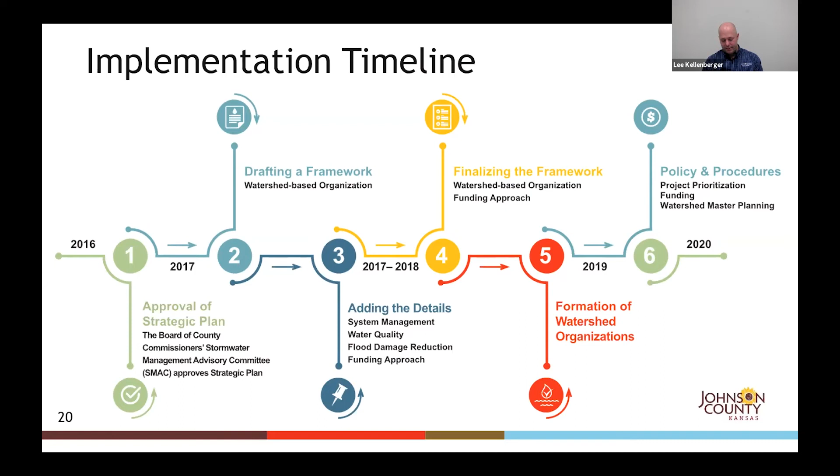When you work on a consensus-based approach, it really can take a lot more time and seem like you're not getting far. But ultimately, in the long run, when you can go back to your elected officials and say that we have buy-in and support from everyone in our community, and explain to them all the thought and discussions that went into these recommendations, we found that we've been a lot more successful at getting things implemented.

controversial moves. And so I personally went to, I think, 15 of the city council meetings and presented the approach to them and why this was the right thing to do. And ultimately, we got all 20 cities to sign on to the new approach. So today, this is how we manage our interface with our communities, through these 6 watershed organizations. It seems to be working fairly well so far.

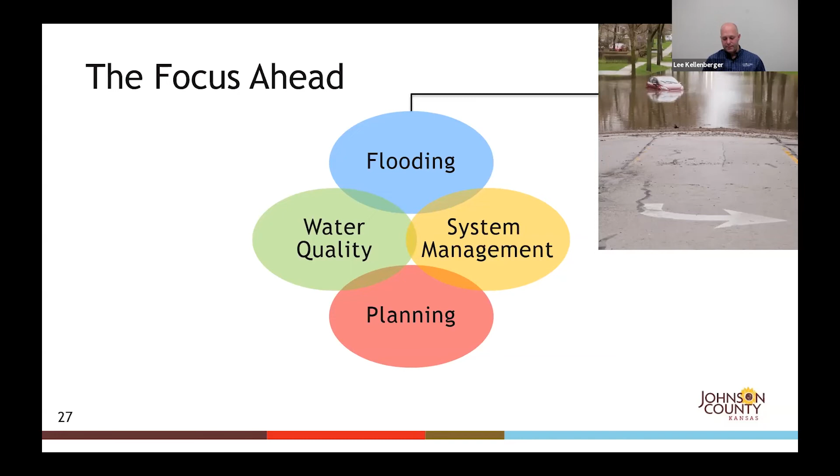We're also going to be starting to fund water quality improvement and preservation projects right alongside flooding. In our scoring system, which is in the works right now, city A can have a flooding project and receive a score in our system for that. City B is more focused on water quality. They can submit a project on water quality, and the 2 can be compared on the same level playing field. So we have pots of money now for water quality, system management, and flooding.

So these can be things like retrofitting existing infrastructure or creating entirely new water quality features like wetlands or even stream bank restoration projects. So that was a big need from some of our cities. And then system management, which I touched on as well.

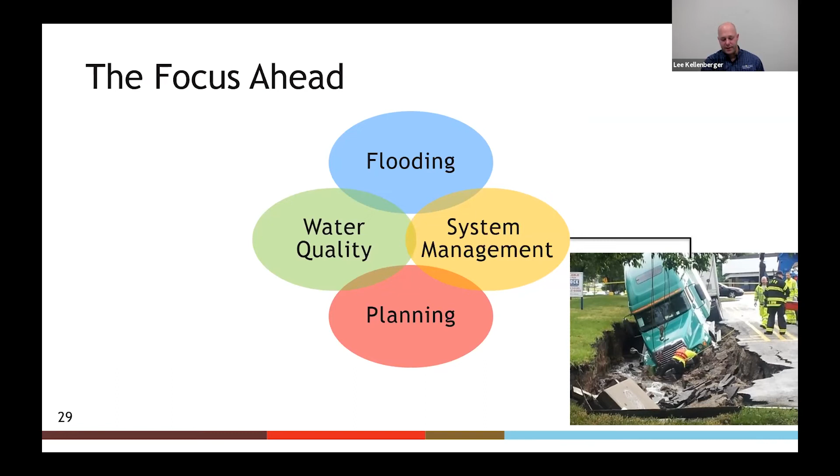And then finally, the fourth component of our program with the new watershed-based approach is planning. Since it's probably beyond the scope of any one city to comprehensively look at the stormwater issues in an entire watershed, because watersheds cross many municipal boundaries, the county program is taking on that role of doing planning at the watershed scale.

This is really important because the flooding problem may be downstream in city A, but the best solution for that flooding problem may not be in that city. It may actually be upstream in city B. So hence the need for watershed master planning.

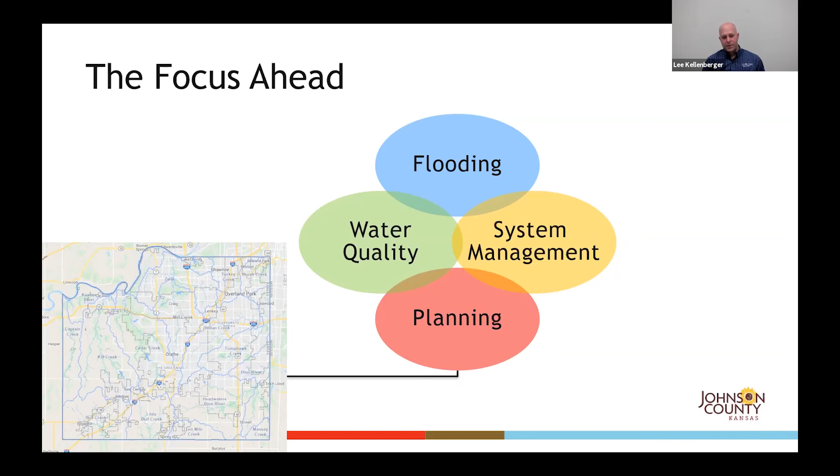We've worked with our teams to look at what is the active river corridor and what is an appropriate buffer width on that. So similar to how we have floodplain boundaries today, we are mapping now in our county erosion hazard boundaries. It's just another good planning tool for communities so that they don't put infrastructure or buildings within the active river corridor or the erosion hazard zone. So that's going to be a new tool moving forward that's come out of our plans.

Some of the other outcomes of our strategic plan and our master plans: it's just generated more conversation around stormwater issues, and I think that's been a good thing, more education to our elected officials. We think we have a more efficient program to benefit more county stakeholders today. And we've been able to develop some really cool and new practical tools to help drive our program goals.

I know that was a lot to cover, 30 years of our program in less than 30 minutes, but just to leave you with some key lessons learned, I can't stress enough the funding issue - how fortunate we are to have a dedicated funding source.

If there's any opportunity or any consideration of that, I would highly encourage you to come up with a funding source. We saw a lot of different programs around the country that collaborate some on water quality things or might do a project here or there, but very few that had a dedicated funding source to do real long-term meaningful work, like it sounds like what you guys are trying to do.

The other lesson learned is to involve all the stakeholders, and even though it takes more time and it's sometimes difficult, you'll have a better product at the end if you obtain consensus along the way, and you can go to your elected officials with full support and buy-in.

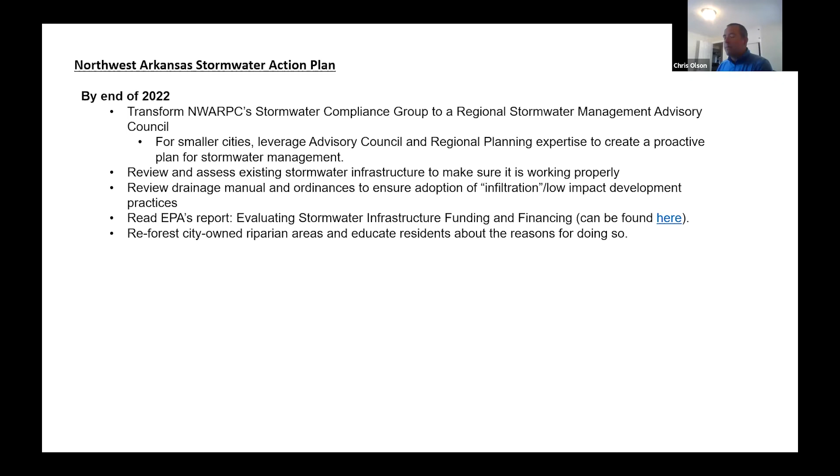Okay, so I am going to move on to my ask, and then we can continue on with questions and discussion for as long as the group would like. But I want to walk away from this event with thoughts on how we could coordinate better, and then what individual communities could do. And so this is, I think, the culmination of my career at IRWP.

This request—okay, here's my request. You guys ready for this? By the end of 2022, transform the Regional Planning Commission's Stormwater Compliance Group into a Regional Stormwater Management Advisory Committee.

For smaller cities, Lee talked about providing technical assistance—their stormwater group providing technical assistance. So for our smaller cities, leverage the advisory council and regional planning expertise to create a proactive plan for stormwater management, not just stormwater compliance. Review and assess existing stormwater infrastructure to make sure it's working properly. Review drainage manuals and ordinances to ensure adoption of infiltration or LID practices, so that they're just not abjectly not allowed.

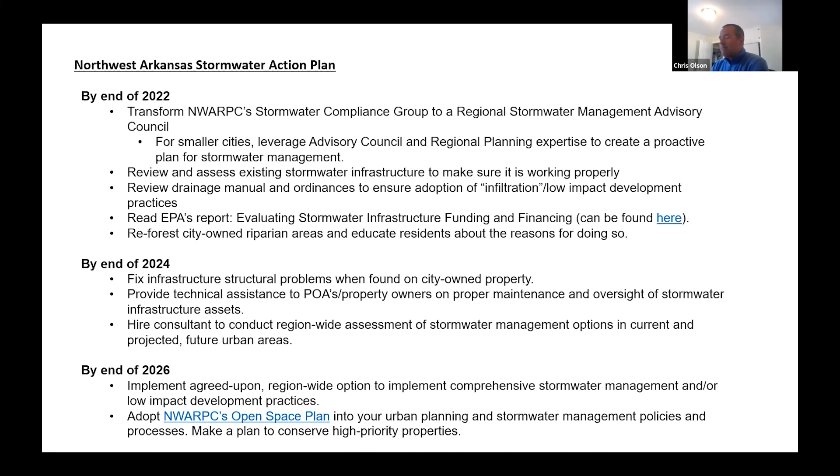It depends. Yeah, the best answer in science.

Hi, I'm Brenda Mackey, I'm an engineer. Just to add on to what Chris was saying, what we're observing is that it's a challenge. We really do have to look at it watershed-wide. When we look up in the watershed, that's our opportunity to really collect the water. So what can we do there? That's going to be our most economical place to start looking for solutions. Where can we infiltrate more? What are some options to reduce impervious areas or use those differently and more efficiently? Because once it gets into that system and starts moving downstream, that's where it's going to get really challenging.

I think it's an opportunity for this group to really use the data that we have now that we didn't have 10 or 20 years ago, when a lot of our criteria was originally developed for stormwater. So we really have an opportunity to start retrofitting our systems to use them even better. And like Lee mentioned, some of the more adaptive real-time controls are really interesting and could work as more of a watershed approach to help us think about that infrastructure for the next generation.